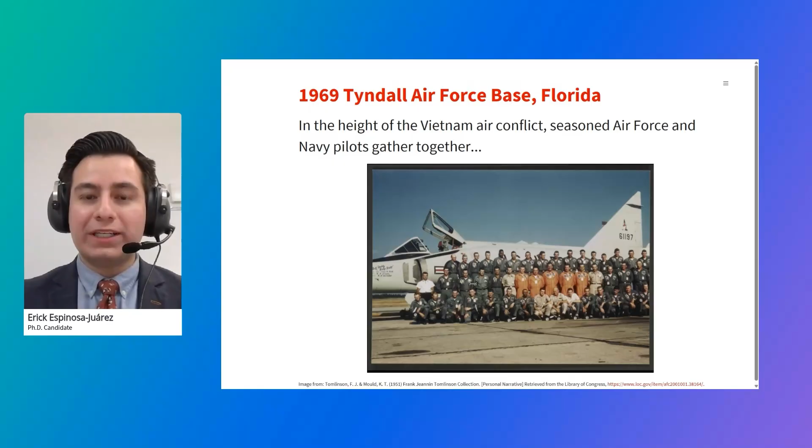In that place, there was this pilot, John Boyd, who presented their view from the US Air Force. They presented a new revolution called the energy maneuverability theory. It was proposed in 1966 by the fighter pilot John Boyd, who came to be a historical figure, but also by a mathematician, Thomas P. Christie. So you see, in 1966, we had already broken the speed of sound. Incredible airplanes had already flown using gas turbine engines. The thing is not that we did not understand airplanes very nicely, but this was a new methodology, a mathematics of dogfighting.

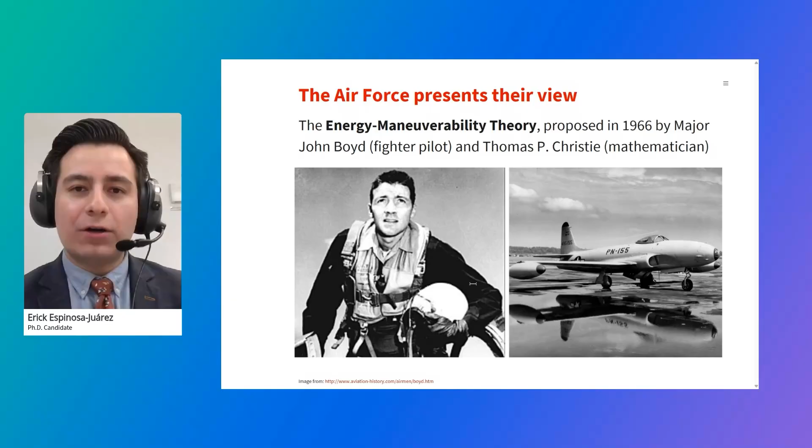Well, of course, the Air Force was exposing their view, and the Top Gun from the Navy was listening. The inter-service rivalry was inevitable. In the book, it's described with a word I really like, coopetition. There is cooperation, but there's also a little bit of competition, healthy, hopefully. So the debate begins because the Navy pilots had not heard about this idea from the Air Force.

And eventually, what happened? When the Top Gun pilots listened, Ski on top, the book says, poked Rattler in the ribs and said, why don't you say something, Rattler, about this mathematically based remark? What exactly did he say? And do you think they were agreeing? Was there something different? This was a new theory from the US Air Force presented to the Top Gun Navy pilots. So what did he say? What did Rattler say to John Boyd?

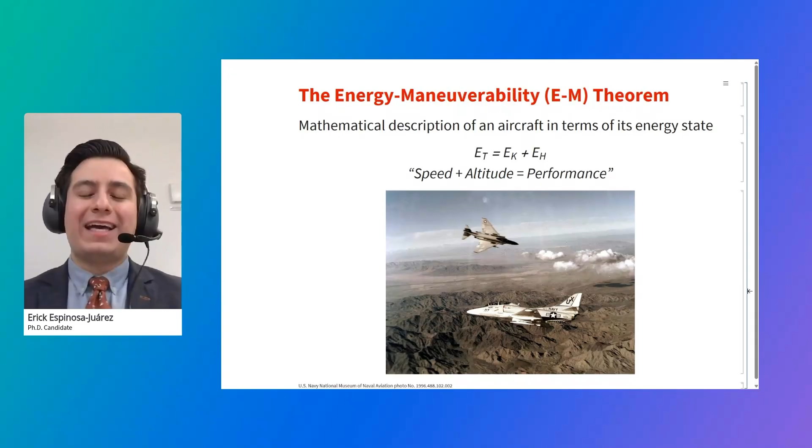So how does that translate? Let's start by analyzing an airplane model. And yes, this is the American McDonnell Douglas F-4 Phantom. This is actually another type of model. This is a scale plastic model that I built myself, from a hobby inherited from my dad.

But now, instead of looking at the plastic model, let's see what's the model that was implemented in the Wolfram Language. It's an association with some very basic and at some point rough data about the coefficient of drag, the drag increase, some aerodynamic coefficients, everything that you can find in Wikipedia. And of course, the approximation is a bit rough, but here's where my model begins and here is where my model ends. So it's really, really, really simple.

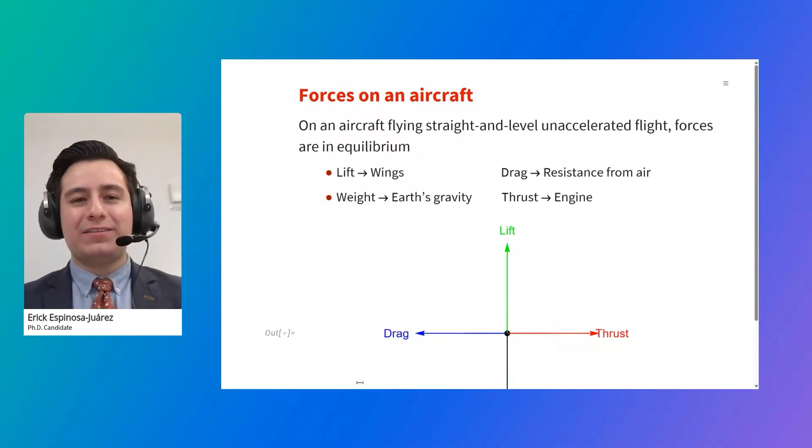Let's see what information we can get out of it. And to analyze that, we can check on the forces of an airplane. When it's flying straight and level on unaccelerated flight, so here the airplane would be flying to the right of the screen, we have the four forces. It's as simple as that. The lift in green produced by the wings that balances the weight, the one that actually makes the magic of flying. And then you have your red thrust given to you by the engine, the one that allows you to move in the air.

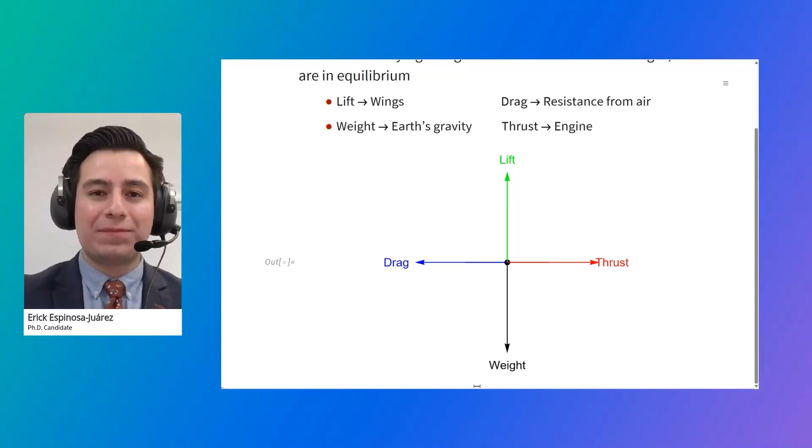And then, not wanting you to move in the air, comes the drag, a product of viscosity, pressure differences, and even supersonic elements. But it's as simple as that. The four forces that act on an airplane. This will be the basis of everything else. But now what happens when the airplane starts turning? Then these forces are no longer in equilibrium, and then things change.

We've all heard about the word agility. We use it in our everyday lives. But when talking about the context of aeronautical engineering, and especially for fast fighters, agility is the ability to make rapid controlled changes in airplane motion. This is a term not even mentioned that much in aeronautical engineering. We usually hear about maneuverability, the ability to make rapid changes, and controllability, the ability to precisely guide the airplane through those changes. And there's usually a balance between these two.

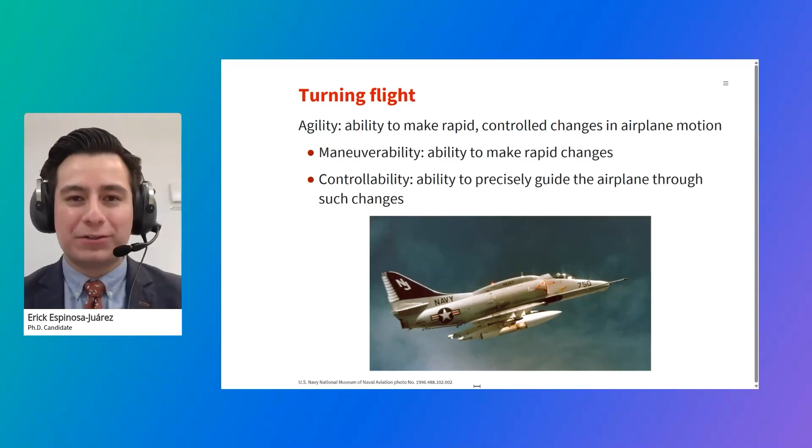A very maneuverable airplane, like a combat airplane, is a little bit less controllable. So it takes a while. You need a little bit more of a fancy controller and whatnot. But these two, maneuverability and controllability, are subsets of agility, like the A-4 Skyhawk that we can see over there in the picture, the one from Jester in the Top Gun movie.

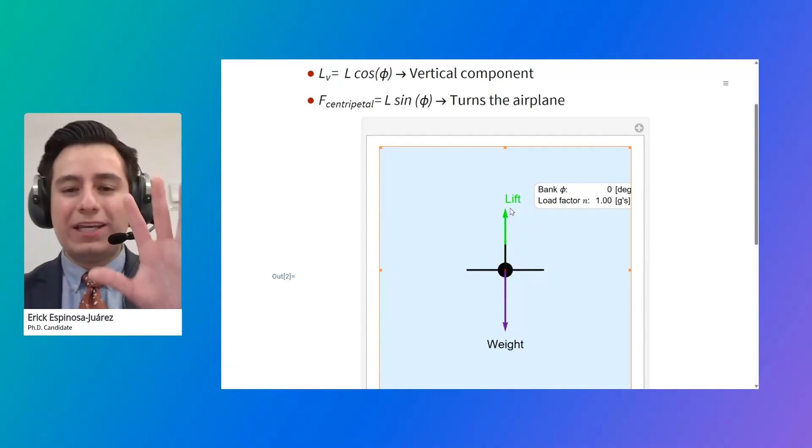Now let's see how the forces that we saw before, we can visualize them. Over here, I have a very simple script. Right now, we look at the airplane from the back. So lift equals weight. Nothing is strange. Everything's as it was before. But what happens when we start to bank, when we start to tilt the airplane's wings?

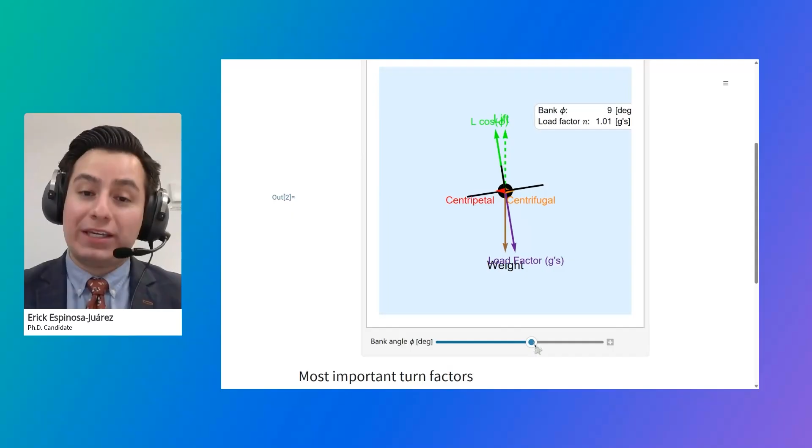Okay, now we have a centripetal force, the red one, which, as you can see, is nothing else but a component of the lift that is always orthogonal to your wings over here. So now it's only going to be the cosine of your lift, the one that's balancing the weight. And everything else, the sine is going to become your centripetal force, the one that actually makes your airplane turn. But we never get a free lunch. And there is another force that we don't like called the centrifugal that is starting to appear also.

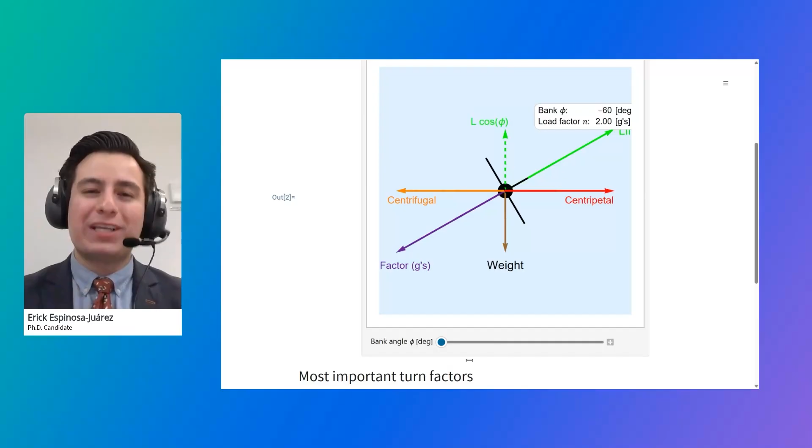And what we don't really like about the centrifugal is that purple one that says over there load factor. There is a resultant that, instead of now pulling your airplane at 1 G as your weight, now you see the load factor over there. Now when we are at 2, your airplane's airframe and pilot is feeling twice its weight. So the so-called Gs, when pilots say, yeah, it's a super high G maneuver, it comes from there. And that will, of course, put some strains on the structure and on the aerodynamics of it.

So the takeaway is that instead of just having a leveled flight, when we bank and we turn, we have these extra things. And what are the two most important parameters from a turn? The turn rate, which is the angular speed in degrees per second, the normal angular speed we all know, so how fast we complete the circle, and the turn radius, how tight, how big this circle is. Of course, a very agile airplane is going to be able to turn really fast, at really high angular speeds and at really tight turn radiuses. So now let's see how all of this plays.

Let's come back, and this is going to be what actually John Boyd discovered. The turn rate, omega, is going to be plotted on the y-axis, and then we're going to have speed on the x-axis. And using these very simple equations, we can get the lines of constant load factor. So you remember the G's that we were talking about? Okay, so this would be the turn at 1 G, at 2 Gs, 3 Gs, and etc.

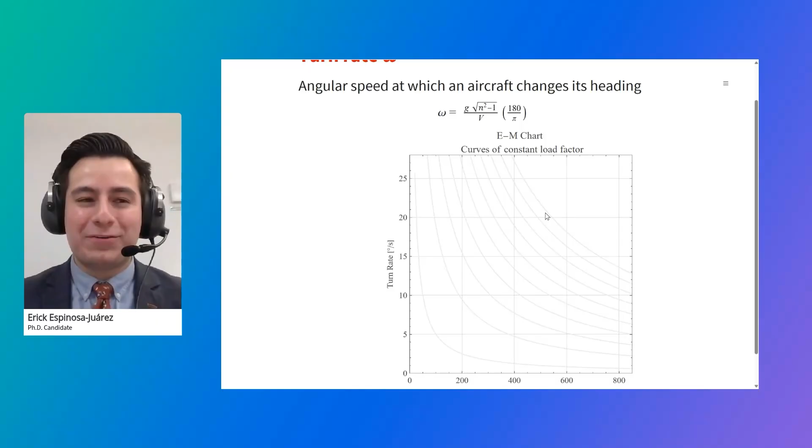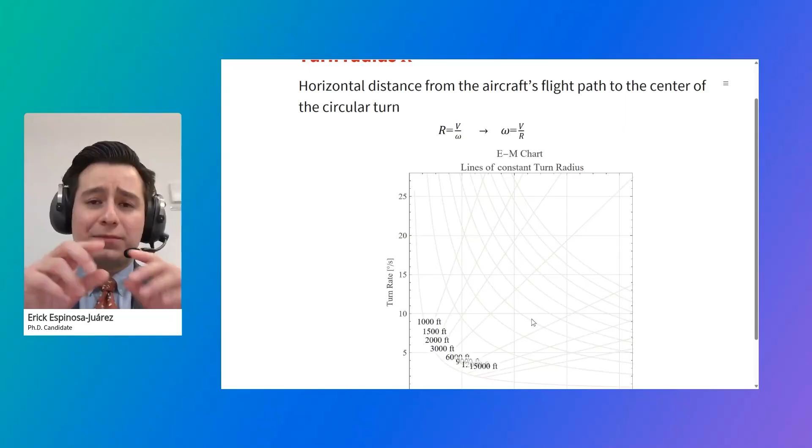So you can see that if you want to turn faster and at higher turn rates, so faster completing the circle, you're gonna be pulling much more Gs on your airframe. That's where the maneuvers are called, as said before, the high Gs. And now let's complement this. Now we had the turn rate, but it's missing the turn radius, as we mentioned before. So the horizontal distance from the airplane's flight path to the center of the circular turn.

The equation, very simple. Now these straight lines appear. As you see, the term is linear. So now this information is starting to tell you not only about the constant G's, the load factor that your airplane is pulling, but also how tight your turn can be. This is gonna be the grid upon which we're gonna build our diagram.

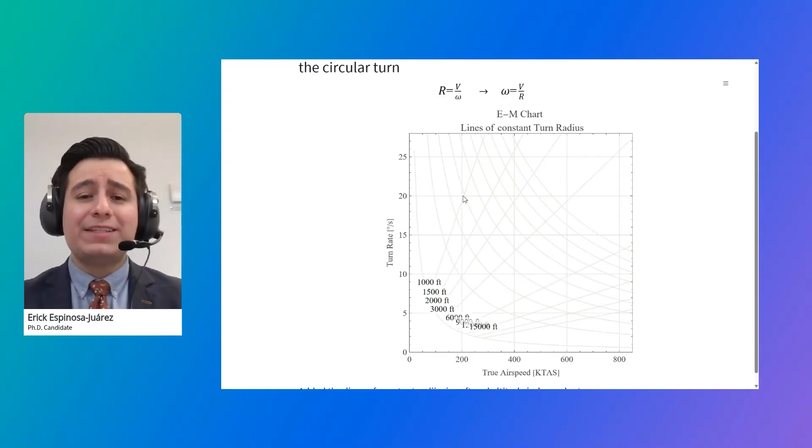Because as you see on the equations, they are still not altitude dependent and they are still not dependent on the airplane. We still have not used our very nice Phantom model. This is just the playground of the turning places. As said here, lines of constant radius, the straight ones, and curved ones, lines of constant load factor. The airplane itself has some limits. It has aerodynamic limits and structural limits.

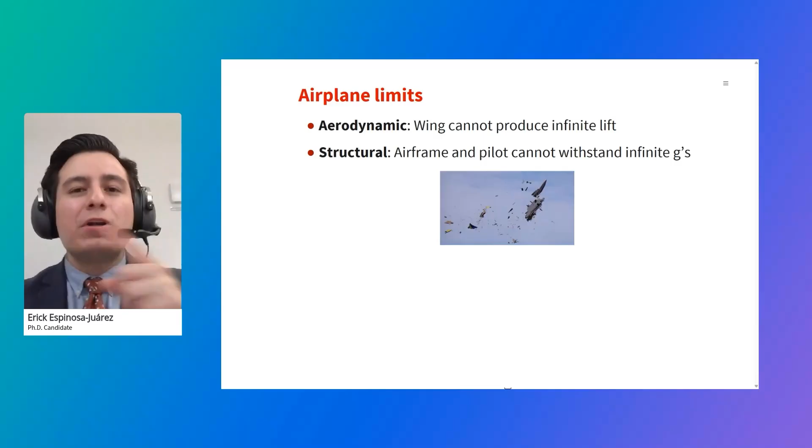The aerodynamic one, because the wing cannot produce infinite lift, because as you saw, the tighter you need to turn, the more lift you need to produce, and there's a point in which the wing will be restricted. And when it comes to structure, the same, the famous high G maneuvers where the pilots are weighing 3 times their mass. Well, the airframe and the pilot cannot withstand infinite Gs. So let's plot these airplane limits in the playground that we were talking about before.

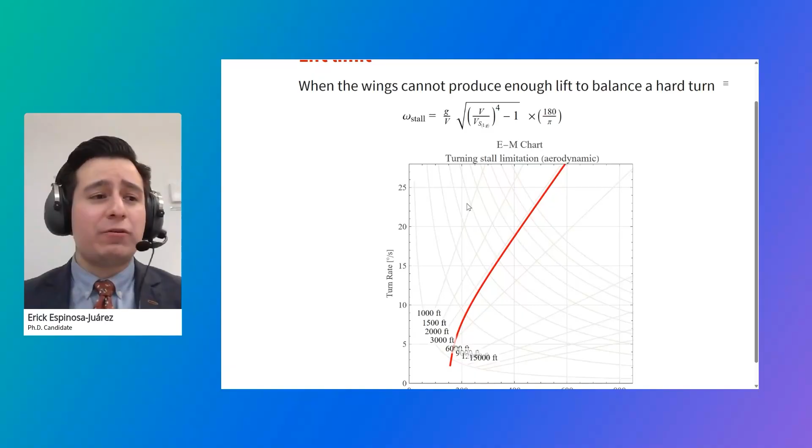First, let's start with the lift limit. When the wings cannot produce enough lift to balance a hard turn, it's gonna be this red line over here, the aerodynamic limit. Everything to its left, the wing cannot produce enough lift to maintain that airplane flying at such tight turns, low speeds. You see the equations, nothing fancy. The audience is used to working with much more difficult and complex things.

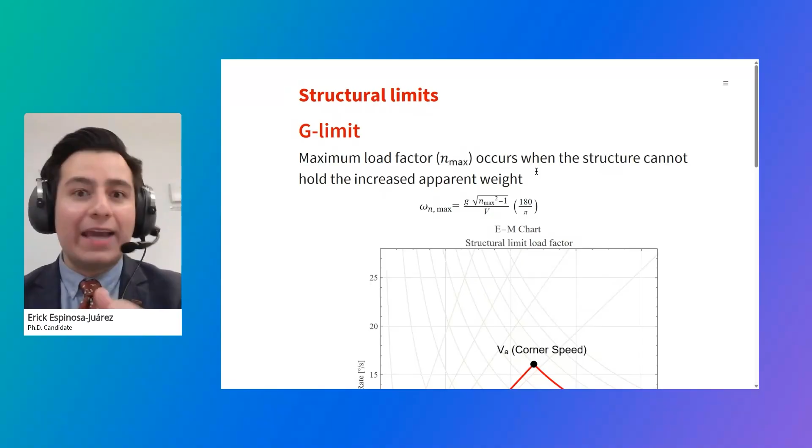We talked about the aerodynamic limit. Now let's put the 2 structural limits. One comes from the G's, the maximum load factor that you can sustain, 9 Gs, and then the pilot might already be feeling blood coming out of the brain and some gray vision and whatnot. And if we plot this, of course, at a fixed limit, usually given by structural limitations, we're going to have the merging of these two, the aerodynamic and the structural G limit.

And it's going to be a special speed called the corner speed. You see, this is the uppermost point on your graph. So this is the tightest turn, the fastest turn rate that your airplane can achieve ever. And in fact, it's called instantaneous turn because we will see that it cannot even do that indefinitely.

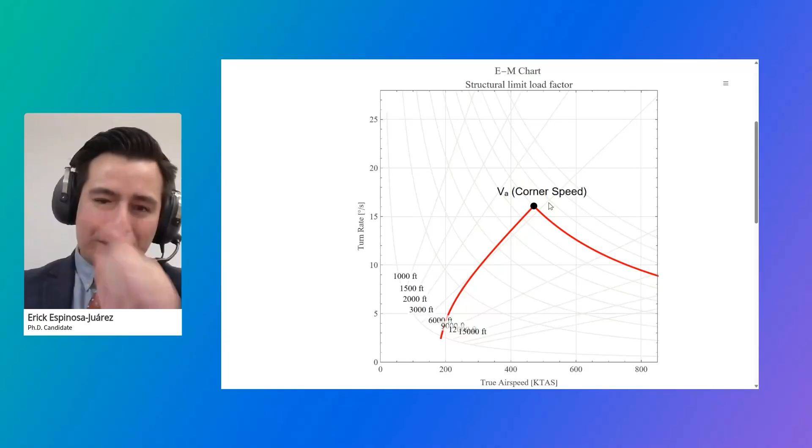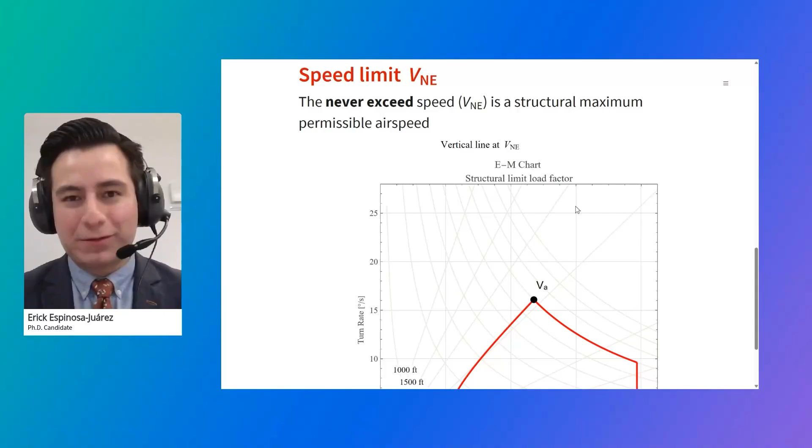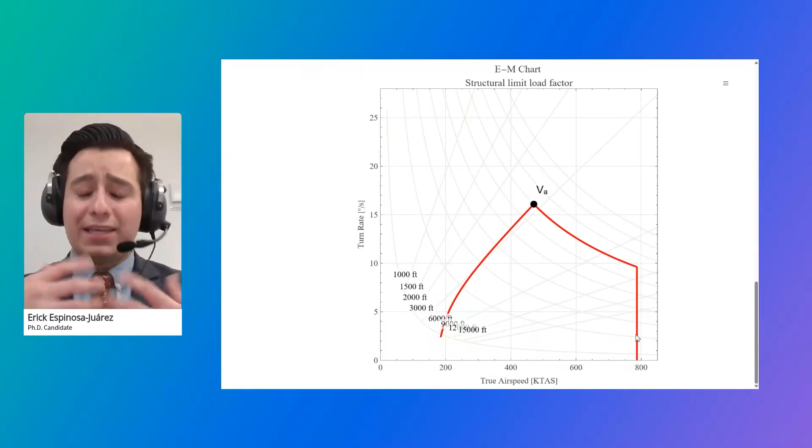But there's another limit missing. Over here, given by its limit speed, the airplane cannot go ad infinitum at extremely fast speed. At some point, the dynamic pressure will be troublesome for the airframe. So we plot this vertical line over here, the V never exceed speed, which is also given by the manufacturer, from structural limitations. And now we have the complete picture of the limits of the airplane.

And you can also see why these diagrams are called doghouse diagrams, because they kind of look like the house of Spike from Tom and Jerry. I don't know. Anything outside of these red boundaries is not permitted for this specific airplane. Aerodynamic limitation and structural limitation.

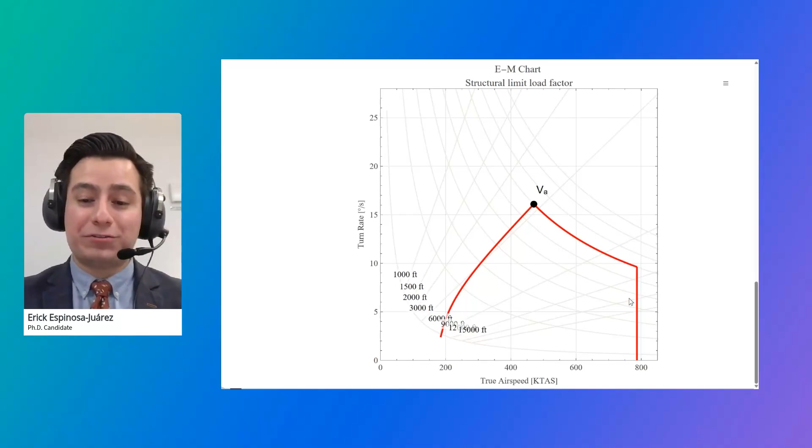But now comes the interesting part. Now comes the actual innovation from John Boyd. There is something called specific excess power, which is nothing else but the energetic coin that the airplane can trade for maneuvering. So the energy state of your airplane that you can exchange for climbing, for turning, or for accelerating. And the units are quite interesting because you have units of power over force. And power over force gives you meters per second. A specific excess power unit is given in meters per second.

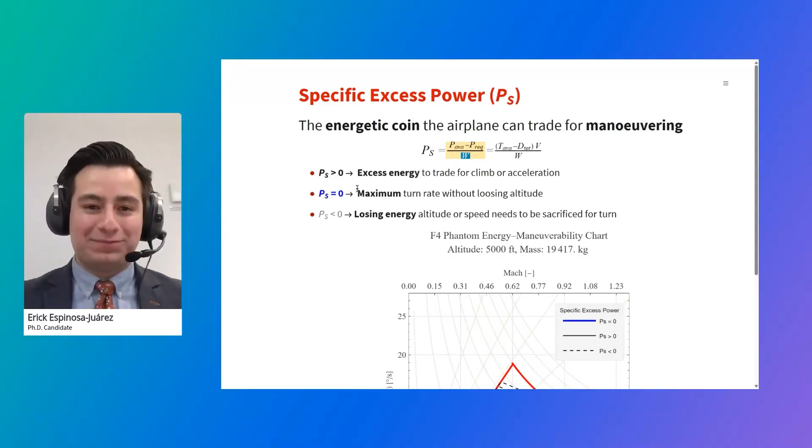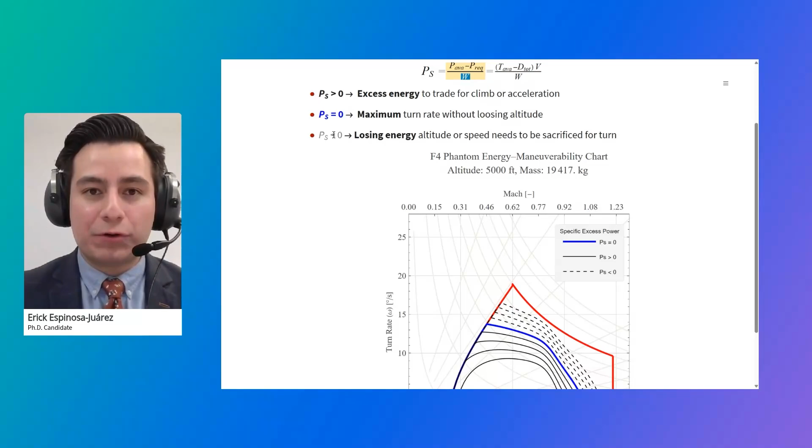When you have positive excess energy, when you have positive energetic coin, you can trade it and everyone is happy. When you have zero, then you're at your maximum. And then you cannot trade it anymore, because when it becomes negative, then you need to trade either altitude or speed to maintain that specific performance. And that is the thing that gets plotted inside of the structural and aerodynamic limits.

Anything below the continuous blue line, those are places where you have excess power. You are in an advantage. Your airplane can climb, can accelerate, can turn. When you are on the blue line, you're on the very limit. And when you are passing those lines, then at some point you're gonna have to decrease either altitude or speed to keep maintaining that line. And there's nothing much left to it.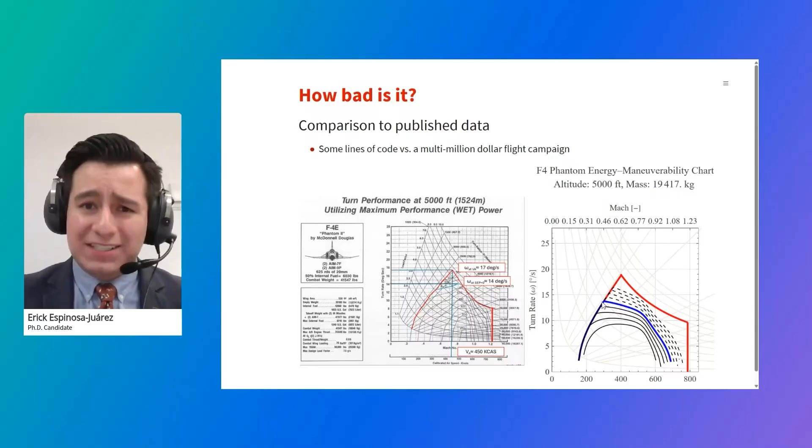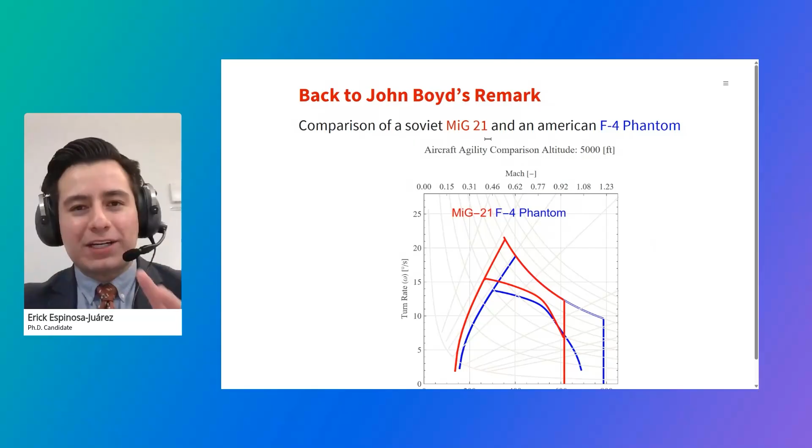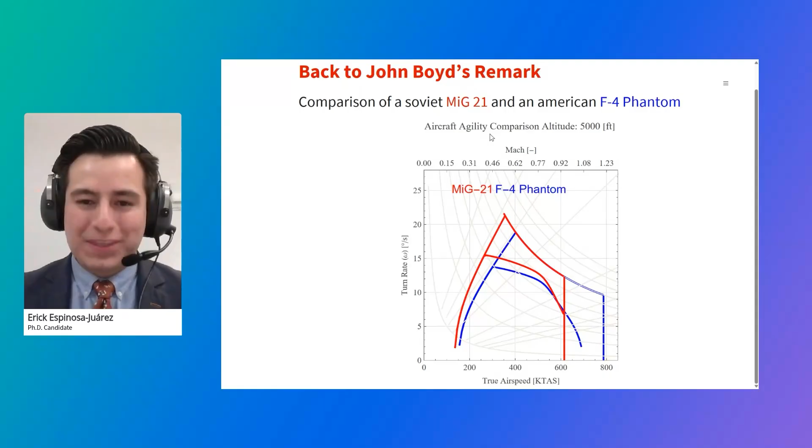But now that we have this, why did he say that you should not fight a MiG-21 with the F-4 Phantom? Well, if we use a similar model to the Phantom, but now for the MiG-21, the Soviet one, and we superimpose them on top of each other, then we can get all this information. The Phantom over here in blue and the MiG-21 in red. For example, we can get its maximum instantaneous turn rate, so the peak. The MiG-21 has it higher, actually. And for you to get an idea, it's been agreed by fighter pilots that 1 degree per second can already give you an advantage. So you can see how high this is.

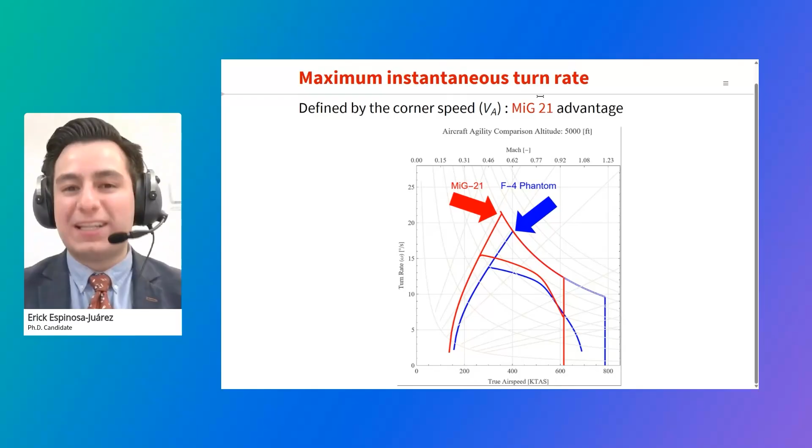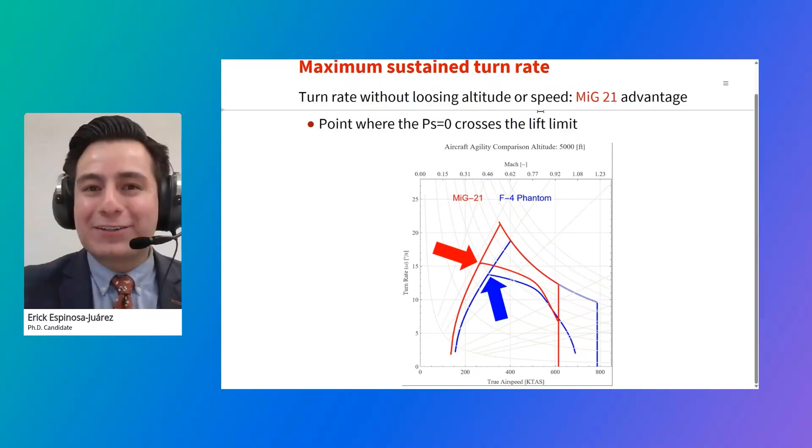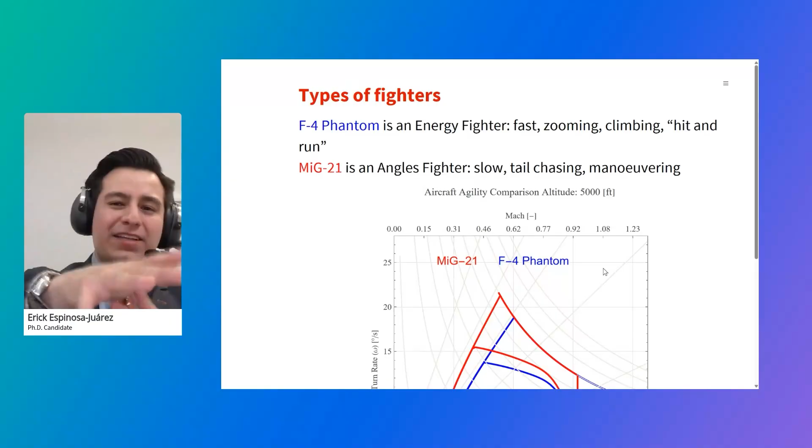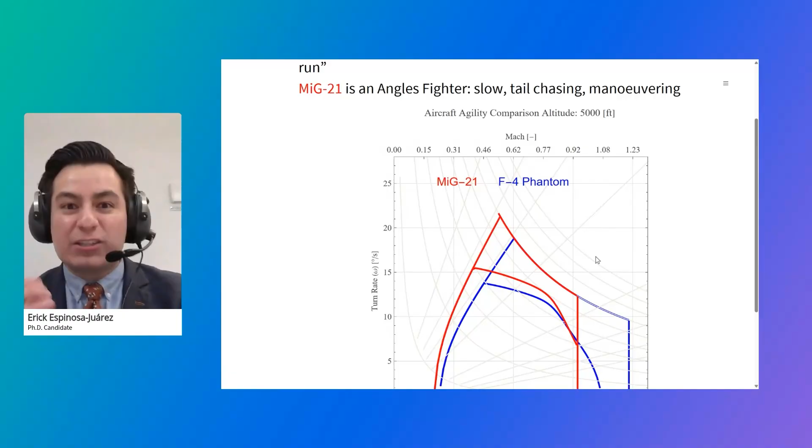Well, but there is another one. The F-4 does have an advantage over here on its maximum speed. You see over here that when the MiG-21 has already reached its limit, the Phantom can still have a lot of velocity. So this comes to say that there are two types of fighters. The energy fighter, like the Phantom could be, and the MiG-21. The Phantom will come fast, attacking, climbing, zooming, hit and run, always keeping energy. The MiG-21, an angles fighter, will like to be chasing the tails, as we say, at slow maneuvering. And everything about fighter pilots, as they say in these books, the tactics go to take the opponent into a flight regime they don't like. So the Phantom taking the MiG-21 into faster speeds, or vice versa, the MiG-21 taking the Phantom into lower speeds. It's always a combination of these two.

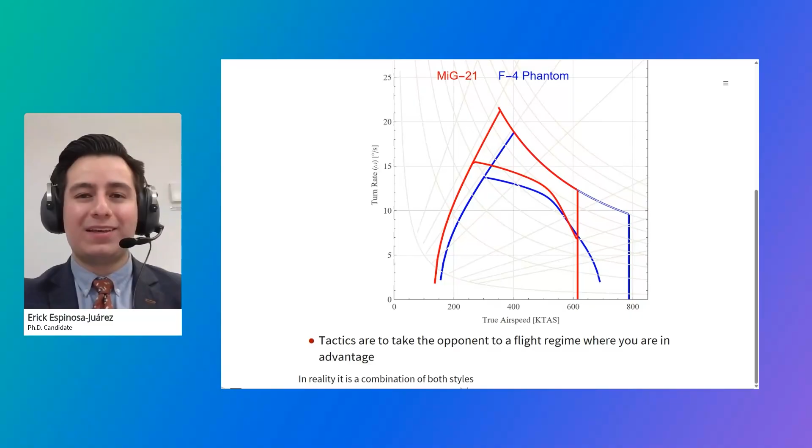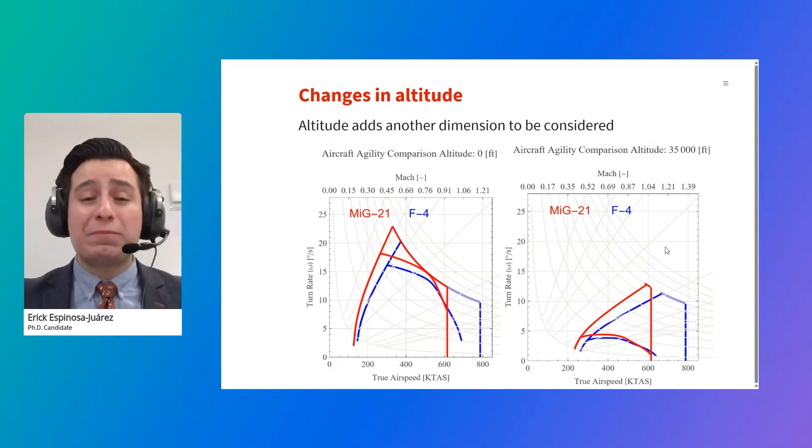This is also altitude dependent, something to remark. It's not the same at low altitude as at high altitude, as we can see over here. And they are also weight dependent. So you cannot get all the information from a single graph. You would have to prepare a lot of them.

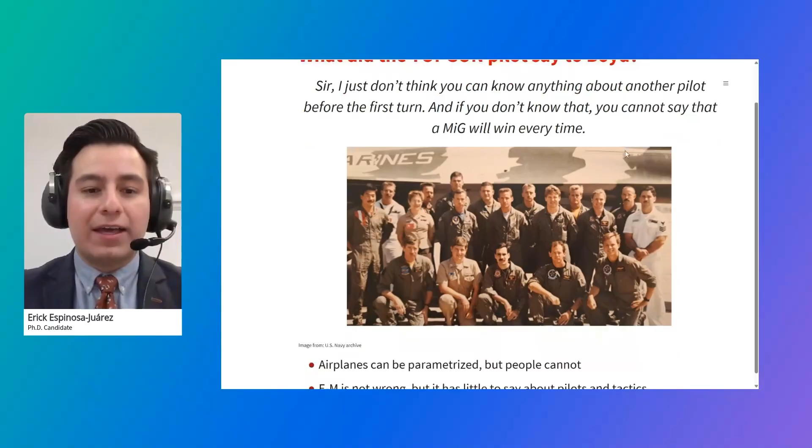And then it comes to the conclusion. What did the Top Gun pilot say to Boyd? Quoting from the book, "Sir, I just don't think you can know anything about another pilot before the first turn." This was the Navy answering about the mathematical modeling. And if you don't know that, you cannot say that a MiG will win every time. Dan Pedersen says that there is something that cannot be mathematically modeled. He said that airplanes can be parameterized, but people cannot. Pilots could not, in this time before advanced computers.

EM is not wrong. Amazing airplanes have come from that, the F-16 Viper, the F-15. But the opinion of the Top Gun pilots in that time was that it has little to say about pilots and tactics. So the conclusion, I would say, it's up to you also, my friend. The pilot is part of the equation. It cannot be quantified as human beings.

And there is something inherent about being there, about the sense of what's going on around us, that some people say cannot be replaced by cameras, sensors, and algorithms. Some days ago, in May, here at Linköping, Saab flew the first airplane completely piloted by AI, the Gripen pilot.

So how is this going to change? Can this also get parameterized, as Boyd said, mathematically? Or will there still be a need for pilots to be up there in the cockpit in the future? I think that only time will say.

And of course, besides the references that I use, they are available for all of you. There is a step-by-step guide available upon request, because I saw online that there are a lot of explanations about the EM diagram as said today, but not that many that say step-by-step how to actually plot it analytically. So if you are in need of that, please send me an email and I'll be glad to help.